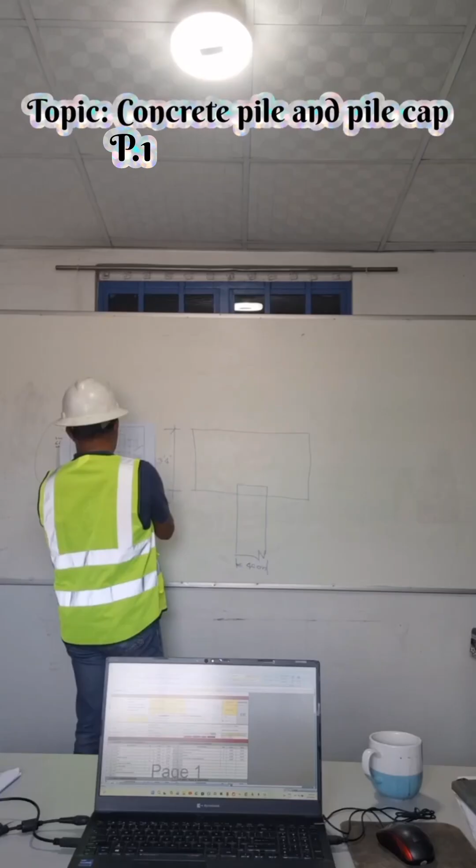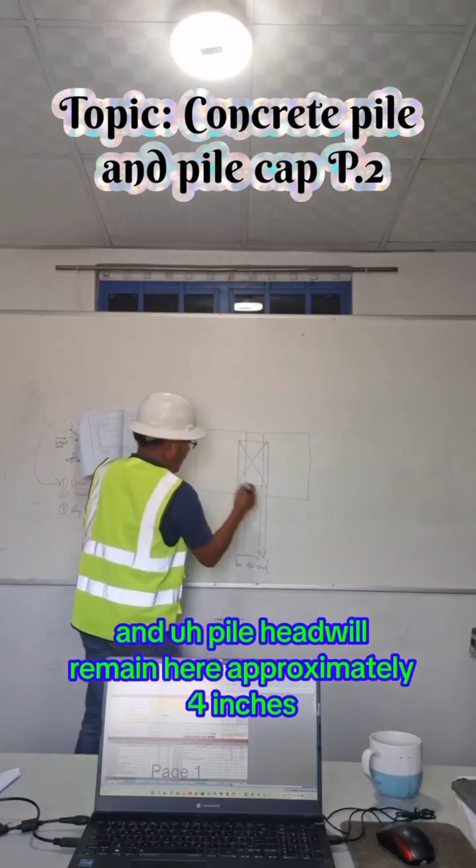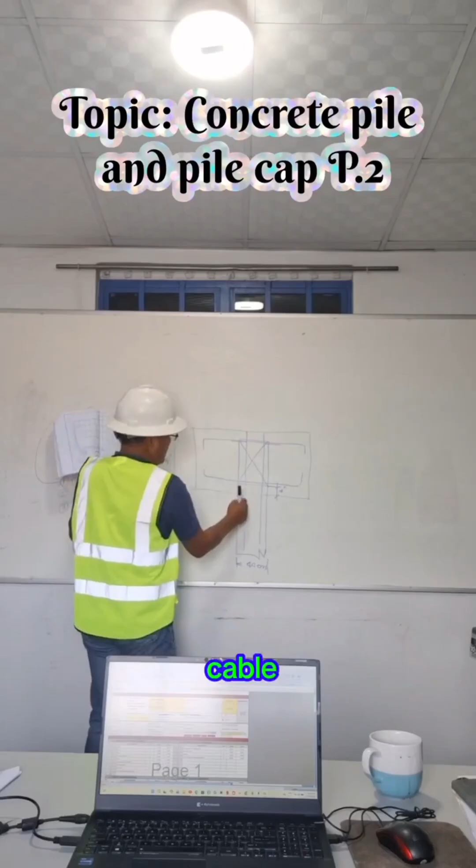So this one, cable strand, we have to bend this, and then maintain the reinforcement for pile cap as shown in the drawing. And also the bottom reinforcement of the pile cap shall be tied to the cable strand of the pile.

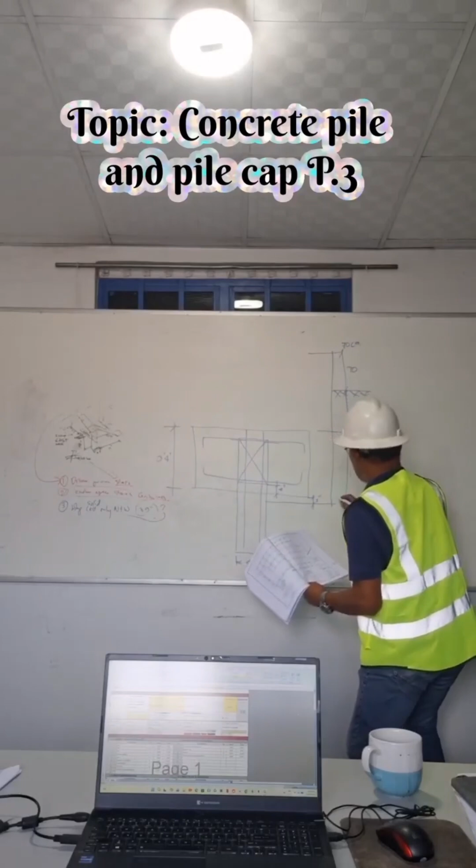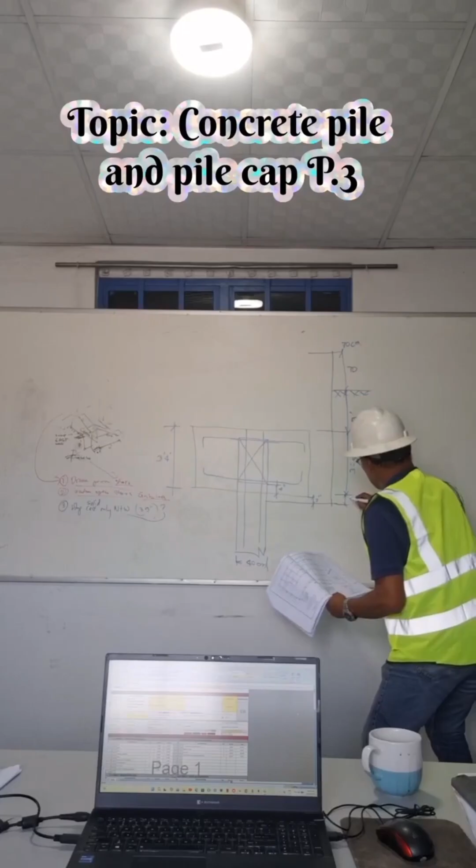And then this one is 4 inches plus 2 inches concrete blinding. Now the height of the pile cap is 3 feet 4 inches. Now this is the concrete cover of the pile cap. The reinforcement is 4 inches. So 3 feet 4 inches minus 4 inches, this will be 3 feet.

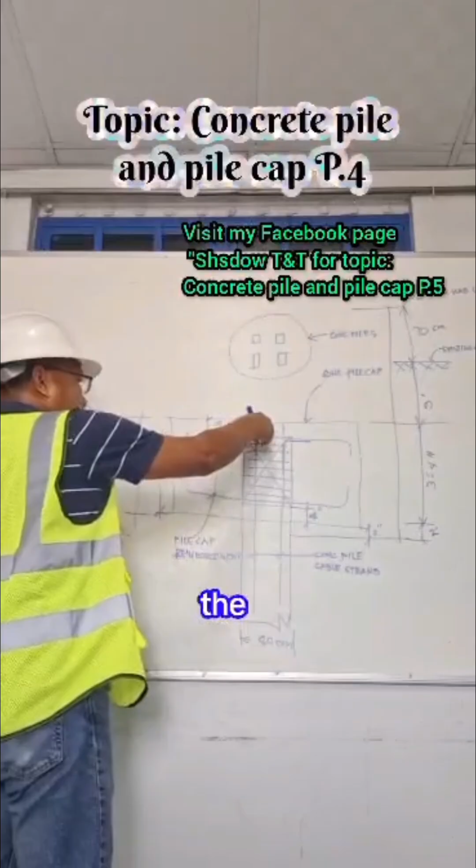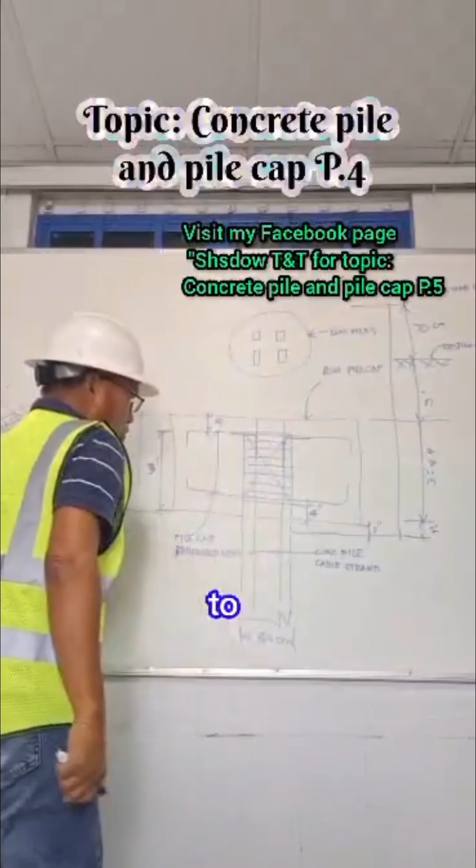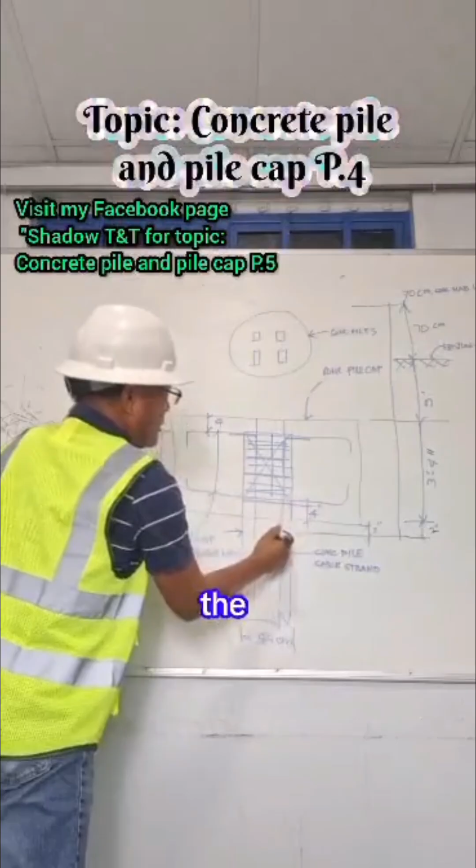After marking it here, then we will start chipping all the concrete, the concrete pile inside the pile cap, up to the level which is from pile head, which is below, to the bottom of the pile cap.

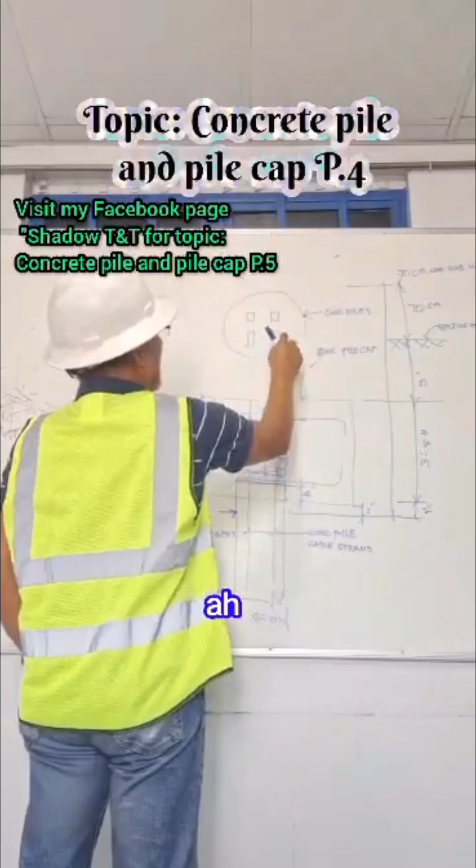Take note that after the excavation around the concrete pile, until the level of the concrete blinding, our water pump is ready to pump the water if rainfall occurs during construction or chipping of the concrete pile, because we are now in rainy season.

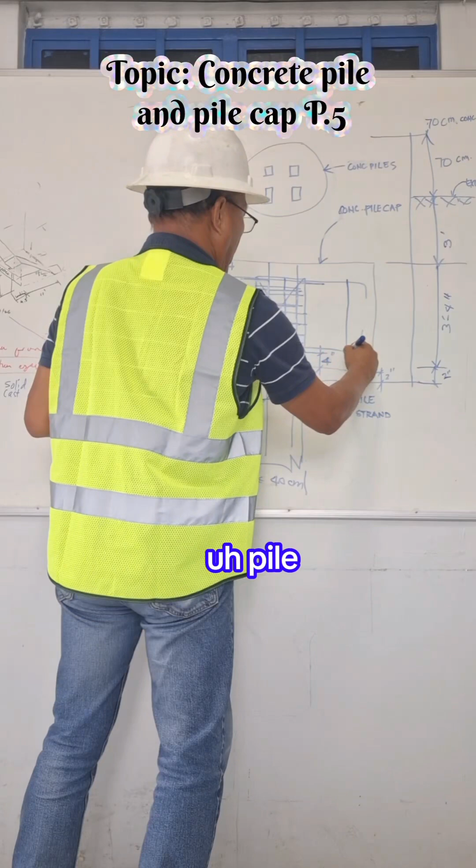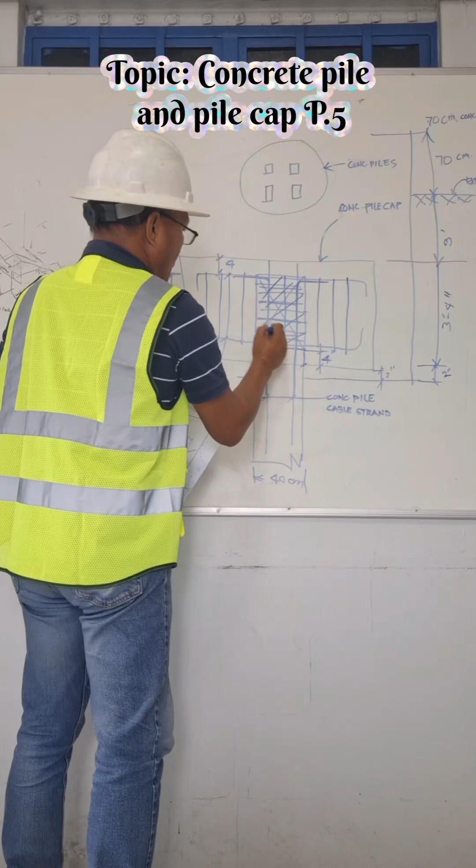Now, this is the reinforcement of the pile. So here, and this is our concrete pile cable strand going down. Okay, so we have to chip this area. After chipping this area, we will embed the concrete pile cable strand to the pile cap reinforcement. Understand?